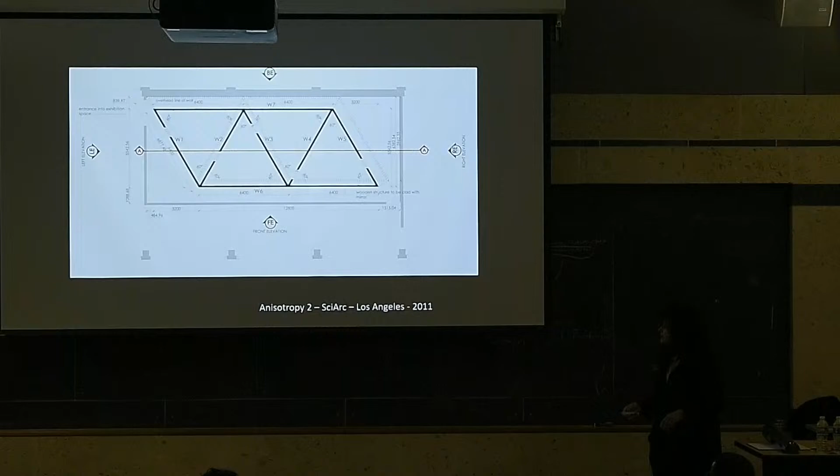But what you don't see is that every wall is not vertical, and all of them are covered inside by mirror. You see that from the top, and there are passages in between them. Because they are not vertical and covered by mirror, when you are inside, you don't know where you are. You are totally lost.

The space can't be perceived as it is. The regularity of the triangle is totally changed, because you don't know where are the limits between the floor and the walls, and because everything is reflective. You are enjoying the space by playing in that space to be lost. I like to lose people in the space sometimes with installation, not in architecture - sometimes it's complicated to do that, but why not? Experimenting, because it's an experiment.

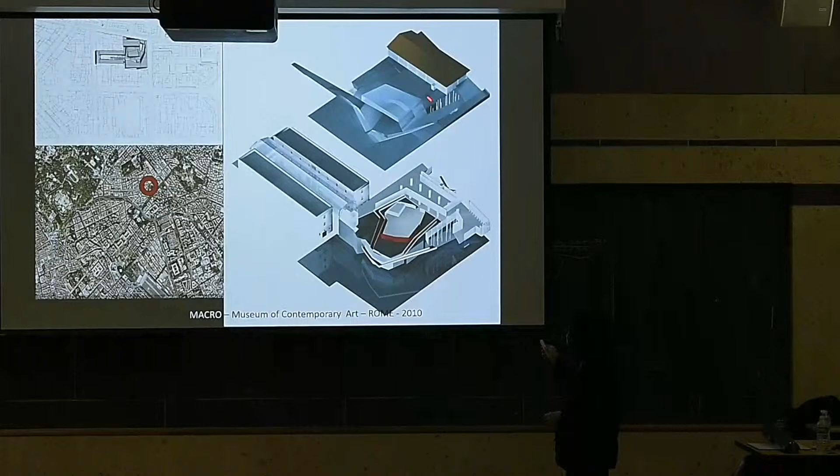But I took advantage of that, because I could hide myself behind the facade I had to keep, just cutting the angle to create a corner for a new entrance. Using the difference between these two levels, these two doors, I created something totally inside the facade, with a new floor 4 meters below the existing floor, at street level, covering the total surface with a big roof, and having in between a ramp going from this courtyard up to the roof or down into the building, to create a double connection at two levels between these two parts. Entering there, you have a huge exhibition room of 1,000 square meters, an auditorium in the center using the space I had to keep with the historical structure connected to the courtyard, covering the total surface with a roof that I had to keep.

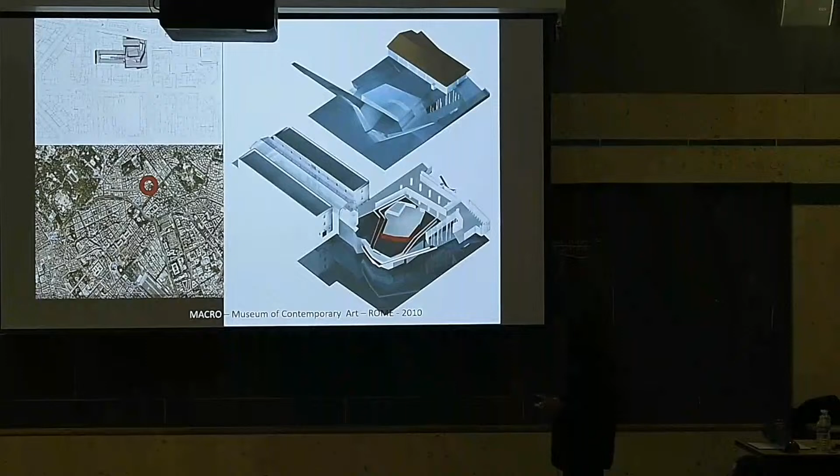So now we will travel in. This is the new entrance of the museum, located between the two facades that I kept.

I painted them white, because everything in Rome is painted yellow, but I wanted them white. So I negotiated with the historical monuments authorities at three levels - the state, the region, and the city - for an hour and a half to get permission to do it white. How I did it: I said I could do it black. They said, what? Black in Rome? So I said, maybe we can go to white. Finally after an hour we agreed. Sometimes you have to negotiate like that - push further and go back, because this is what you want to do.

This is the back. And between these two facades, I created a cafe, a glass box suspended over the entrance, in the street. Because this street turns a little bit, when you're inside you have the impression that you are in the street, over the street.

So we start underneath the cafe and enter a little courtyard, because they asked us to keep a courtyard with some trees. As soon as you enter, there's another level - the cover, the roof, the surface at the entrance, and the mid-level, which is a passerelle, a promenade. I did this because this pavement is the basalto we have on the pavement in Rome, and on the roof cover too - it's basalto. These are two public spaces, one outside, one inside, continuing the city and the pavement.

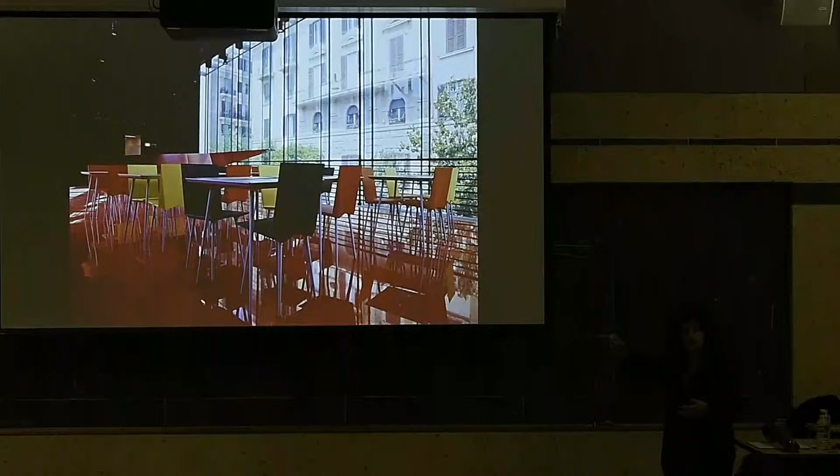And what is it, why do I show you that? This is because the ground floor is in relation to the ground floor of the surrounding buildings around. There are only residential buildings around. The cafe is at mid-level, so it is connected to the people at mid-level of the building. And the roof is connected to the people on top. So there are different connections to the area around, thanks to the different levels that we have.

And the toilets - I speak about toilets, and I show my toilets, because you have to know, if you think carefully, that toilets is a space that has no regulation. This is the only place where you can play, you can experiment, you can do whatever you want. Because you just have to have a surface dimension, you have to have some ventilation and light, that's it. So nobody asks you anything about toilets, so you can play with toilets.

My toilets are like a box that I inserted under the old structure, covered with mirror stainless steel outside and inside, with a big mirror at both extremities. In the center, there's an object that is white and becomes red when you want to wash your hands, because you're manipulating your hands above it and crossing infrared coming from the ceiling. As soon as you cross the infrared, the water comes up, and the dryer comes up too. So you play with it, and you smile when you get out of the toilets. Nice, no? It's an art piece also.

This is another museum I did, as Igor said, the Frac in Rennes, west of France. It's a particular place, a bit outside at the limit of the city, where they were building a big park, but also a particular place because there's an art piece erected there, from a French artist who did concrete art, playing with geometry and mathematics.

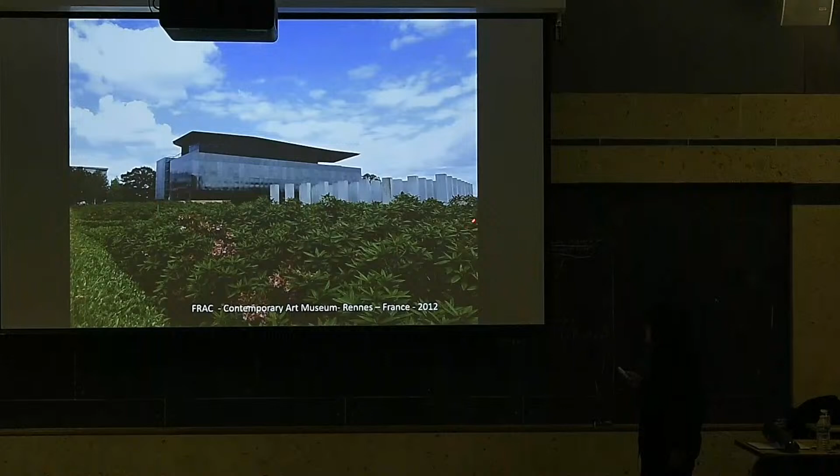She was 92 when I won the competition, and she gave regulations for the building's competition. She said she didn't want us to light a piece from the museum, and that we had to create a silencious facade, so I decided to respect what she wanted. It wasn't erected yet, but it was erected later on. This piece has maybe 72 stones of granite, with dimensions of 81 by 72 centimeters, 4.5 meters height - so it's playing on the number 9.

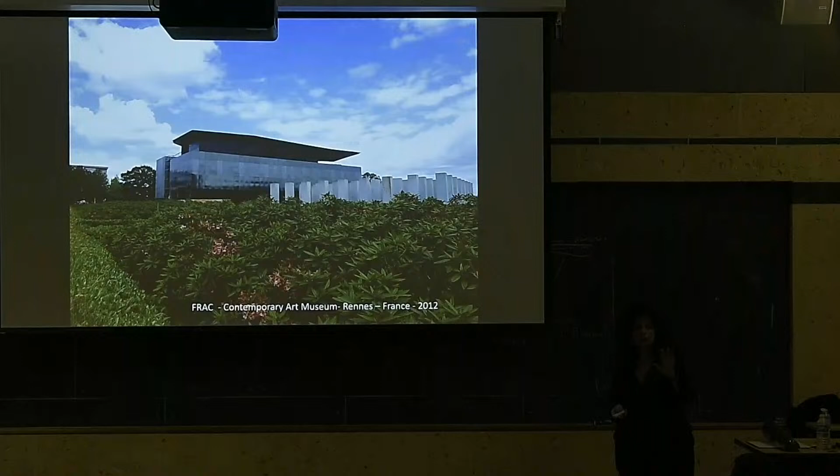So I was thinking, okay, my facade is black. It's a black monolith, but this black monolith is made with different materials. The top part covers the main exhibition room, and is covered with black mirror stainless steel facade. So it's black, but because it's mirrored, and because the weather and the sky change every hour in Brittany, the color of the top changes a lot.

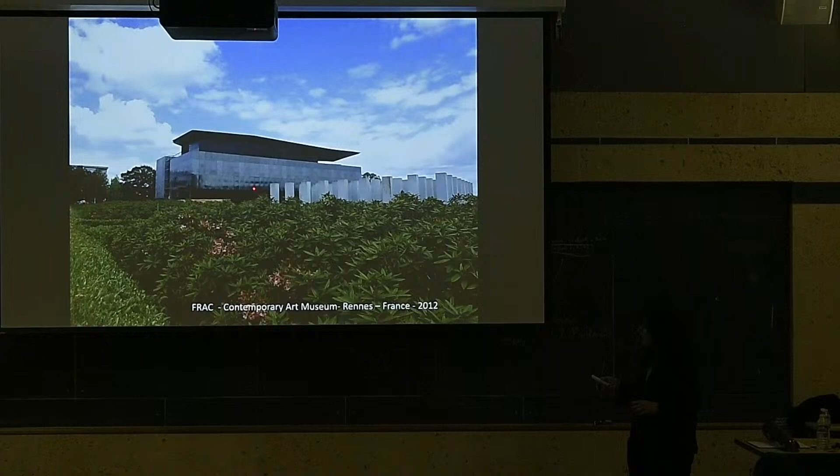Below, the mid-level is at the level of these stones. Below that, there's glass, starting from black to light gray. On the side, this is a black concrete block, but you see it as gray because the weather is dry. As soon as the weather becomes humid, the concrete becomes darker and blacker. So there are 3 different kinds of black, playing with the color only through the weather.

And the entrance is there - you don't see it, but now it's written that it's the entrance. So it's a silencious monolith because the artist asked for that.

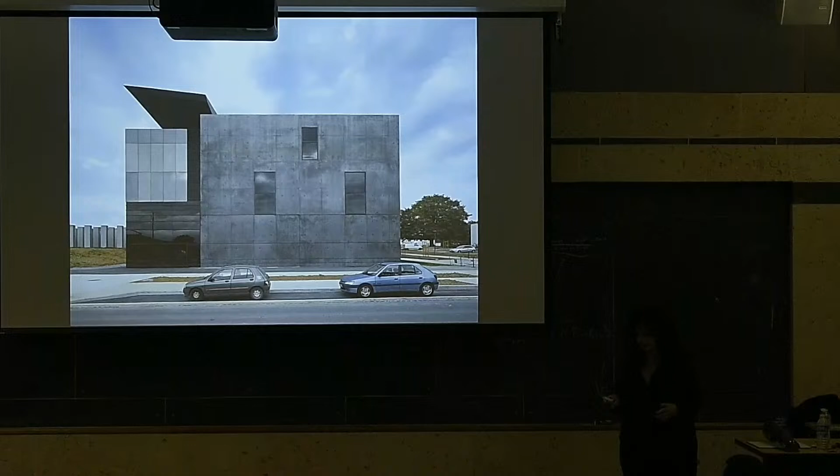But inside, this is something else. I cut this monolith all the way along, created a glass roof on top to light the central part of the museum, with an auditorium in the middle, and all the elevators and the promenade in the middle. As soon as you enter, you face the back side of the auditorium, and you can't go there, even if you see there's a lift.

You have to go back to the facade, and you see that the facade is transparent, and you have to take these steps - climb them all the way along the facade until you reach the cafe first, on the park side, and then go to the back side to walk the steps and the ramps in the middle of the cut I made in the volume. Sometimes there are just steps, sometimes ramps, and sometimes a stair, which is just sheets of metal anchored in the concrete with just a parapet.

It's 30 meters high, from the top roof to the storage below, inserted 8 meters below the ground floor. So it's a kind of void, very narrow, very long, but could be problematic for people who have vertigo, because it's very narrow.

So I decided not to do the usual glass parapet that you have usually, with something on the bottom and the glass standing up. I said we should inverse that. So we decided to create an inverse parapet by having this big row of steel and anchoring the glass under this handrail. It took a year and a half to convince the control office to do it, because it wasn't usual - it wasn't in the regulation, it wasn't anything. But after that, we succeeded in doing it.

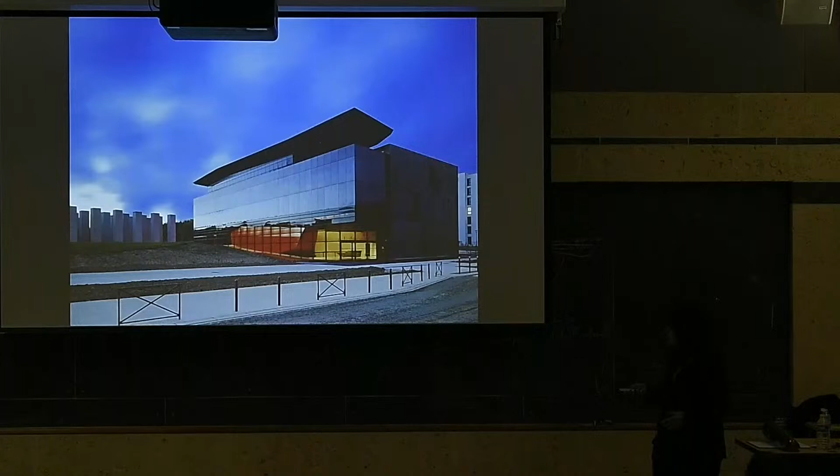And at night, the light is coming from below, but not outside, because we lighted only the auditorium. And the top part becomes more and more darker until it becomes like a lantern.

In China, I did a competition also for a paleontological museum. It's a place close to Nanjing where they discovered the bones of the man of Nanjing. At this time, it was one of the first, the oldest one discovered on Earth. And this man was living in these mountains, in grottos in these mountains.

So I went to the site, I visited the grottos, and I saw where they were found. When you are an architect and you visit such a site, you are moved to know that you are walking on the path of the man of Nanjing. That means millions of years before us.

So this is particular. I was thinking, these people—because it was a couple—were living in the mountains, and we could establish the museum wherever we wanted.

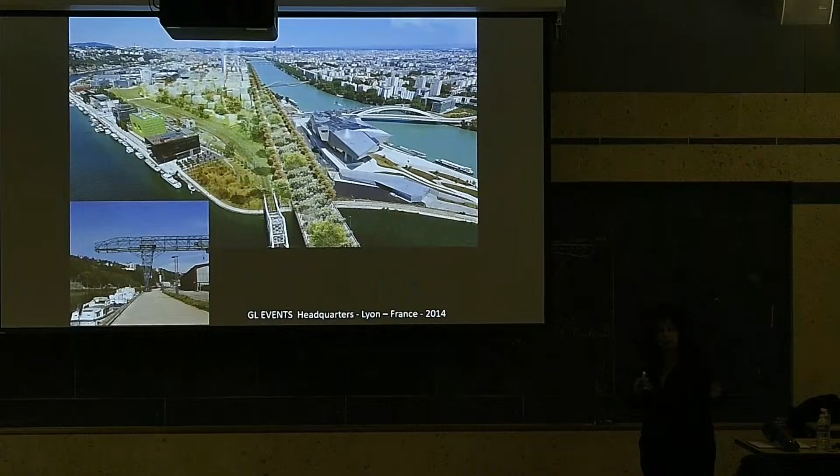So, because I was at the end of the site, I decided to play with the objects still remaining there, which are the big cranes used to transfer goods from the land to the river, by building a particular structure. My plot is that one.

But I decided to pivot the top part to go toward the river, to have the end of the block meet the angle of the bank. And to create that—this is 1, 2, 3, 4, 5 floors...

...in cantilever of 28 meters long, I had to create a huge structure inside. And this structure has 3 pylons, in reference to the pylons that we saw before.

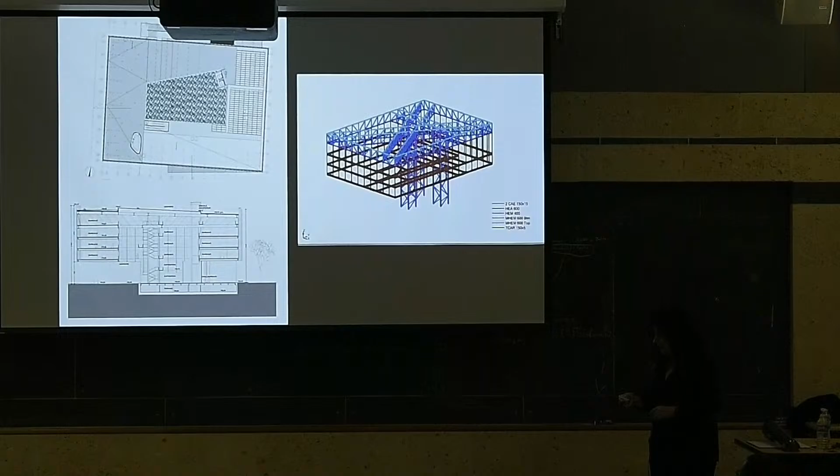And with a huge structure on the top to hang all the floors from the top to bottom. And we built that like that. First, we built the ground floor, the underground with the car park. Then we built a column, the only column in concrete that we have for the shaft for everything that we needed. We brought by the river the pylons and all the beams. And then from this huge structure on the top, we hung the floors. So they are really tiny, but they were suspending the floors below.

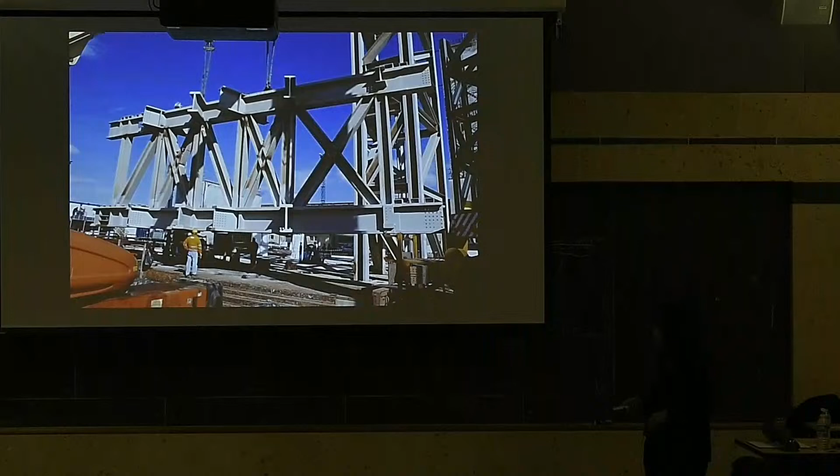The main beams on the top are very high. You can see that in reference to the man on the bottom. And no, this is not that. This is the building in cantilever of 28 meters going to the river.

And we had to work at the beginning of the competition with an artist. They asked that we work with an artist to insert art into the building. So I worked with Felice Varini, a Swiss-French artist living in Paris, who works on point of view and perspective. I told him, okay Felice, I will do a very simple block, please change the perception of my building. And he said, first, you never give an order to an artist, I do what I want. I said, okay Felice, you will do what you want.

So he came back to me and said that he will erase architecture, which is arrogant compared to the landscape, by taking photos from the top of the building, a virtual place on the top, taking photos of the 4 directions, and reapplying the photo on the facade to make the building disappear into the landscape, but in black and white.

And I think, okay, thank you Felice, because my block is transparent. This is for offices, and I will use this piece of art to filter the light inside. So finally, art is useful. And he said, oh no, this is not that. So that's a joke between us, like that.

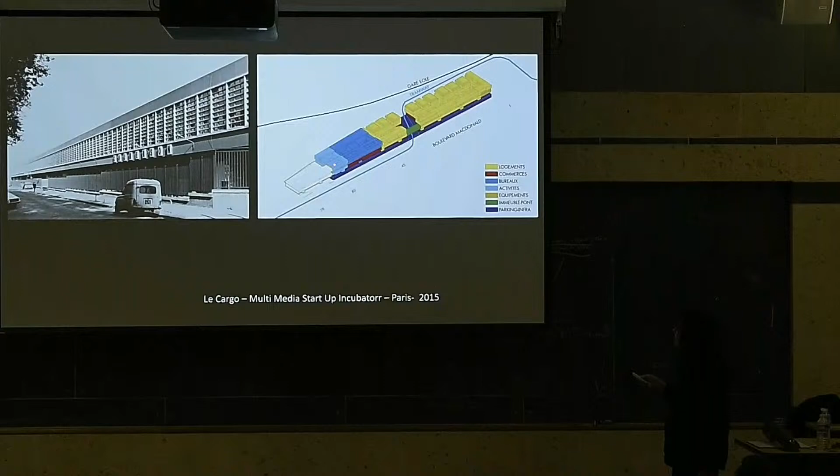Rem Koolhaas gave just a very simple regulation. He said first, the ground floor is crystal, because this is transparent, this is commercial. Then you have to keep the structure, which is in concrete. You have to step back, again crystal, a transparent facade, and then again something solid.

So I said, okay, what can I do with that? I decided, because it's a multimedia startup incubator, these people are creative, these people are full of ideas. So I will create my facade with bubbles.

On the south facade, they are white. On the north facade, they are black. And on the side, they are black and white, because I'm the only one who has a side facade. With that, I said okay, now the motto of the building will be everything black and white inside, except the meeting rooms, which will be bubbles, red bubbles.

So above the lobby, which is black and white, we have a bubble for meetings above. On the back side you have another bubble. To go there, you have to take a little passerelle to go inside that bubble for a meeting.

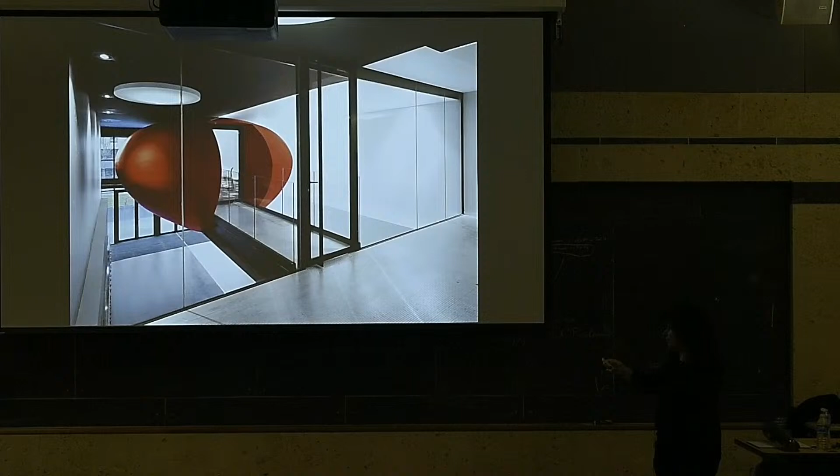We designed tables that are not regular, because this is for creative people, so they can sit as they want. We decided that they will do as they want. We redesigned the carpet with portions of circles, bubbles again. And the lift arrival at every floor is black and white, and the inside of the lift is black on one side and white on the other. When you push the button, you don't know which one is coming, the white or the black.

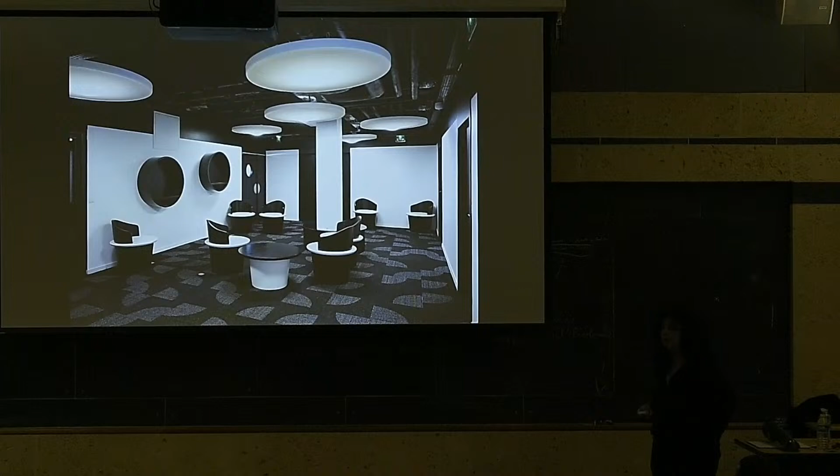On the back side there are some seats and tables where you can work. And then on the top part, we have huge bubbles overlooking Paris, because we are very high in Paris. And you have also, okay, and that's it.

And this is the last office building that we built in Paris. Maybe you have heard, maybe you didn't, that there is this new tower in Paris by Renzo Piano, which is a new courthouse, on the north. My site is in between, that huge railway coming from the center of Paris, the Gare de l'Est, and another bridge passing above over the boulevard which is below, and a little bridge coming from the courthouse. My building is just in between these two bridges.

So my building is going down to the boulevard. Under that we have 3 floors of public car park. We have to maintain and sustain the traffic of the bridge coming from the station. We have a tunnel under this bridge, because this tunnel is to bring the prisoners to the courthouse, very controlled by the police.

I propose to have some offices immediately on the boulevard and to create the tower like that, not a tower, 8 floors only. But I twisted the first block, because maybe you saw that this is built with 3 blocks. When I was passing on the boulevard below for the competition, I discovered that the first part could be seen with a different facade, turning, twisting, to have different views on this building.

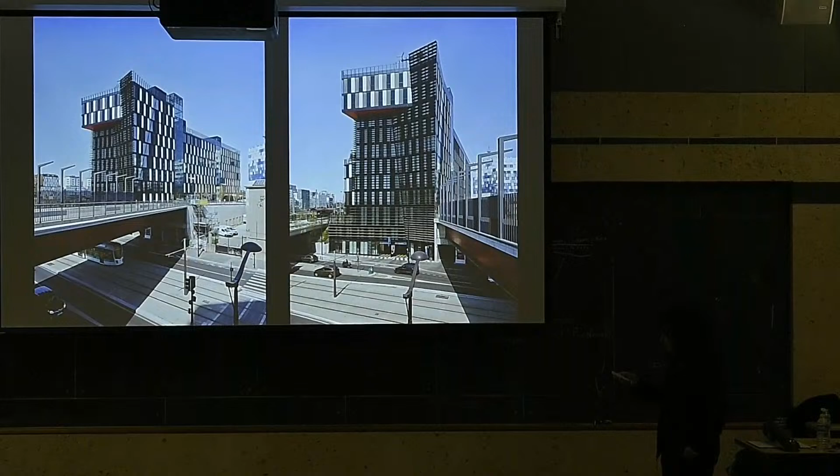So I decided to twist it and to have that on the top, at the front going down to the boulevard, to create that with a particular structure, because the city of Paris is asking to have wood in buildings today. So the pillars are in steel. The slabs are beams of wood with concrete slab connected to them. And that means that this top part is in cantilever.

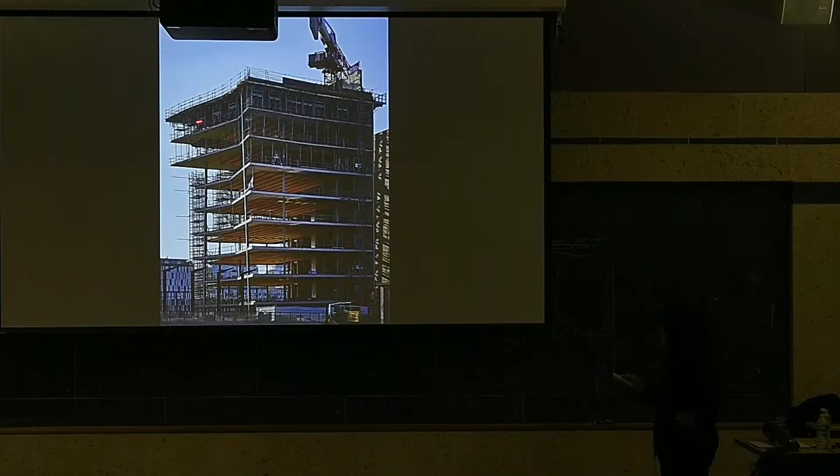And when you go into the offices plateau, you see these beams in wood, and in between the beams you have the shafts. You don't see anything, and you have the petals suspended in the plateau. The staircases are large, because I wanted to have that as a greenhouse, a place for traveling, for connection between the different floors, and the top part is not. This is playing with the light, with the serigraphy of dots on the glass, to protect from too much sun, and in the night.

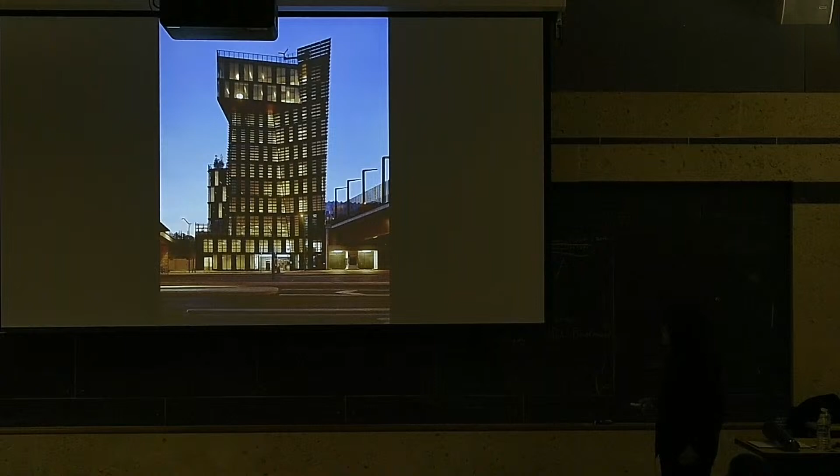So I did a tower in Barcelona. This tower was already a concrete skeleton before, which had been stopped in 2008 because of the financial crisis. A client, a company partially funded from New York and partially from Luxembourg, bought it and decided to create a tower.

This was not a tower, it was a building, quite high, but not a tower. On the back side, we had another building. So we proposed, because it was a competition again, to demolish that building, add all the floors and surfaces we had at this part to the tower, to create it to go up to 100 meters, what the client wanted.

We discovered that the regulation of the place allowed us to go further at every floor to create balconies and reach the 100 meter limit. But for doing that, adding a lot of structure and weight on this building, which was a concrete skeleton from 10 years ago, we had to reinforce the foundation.

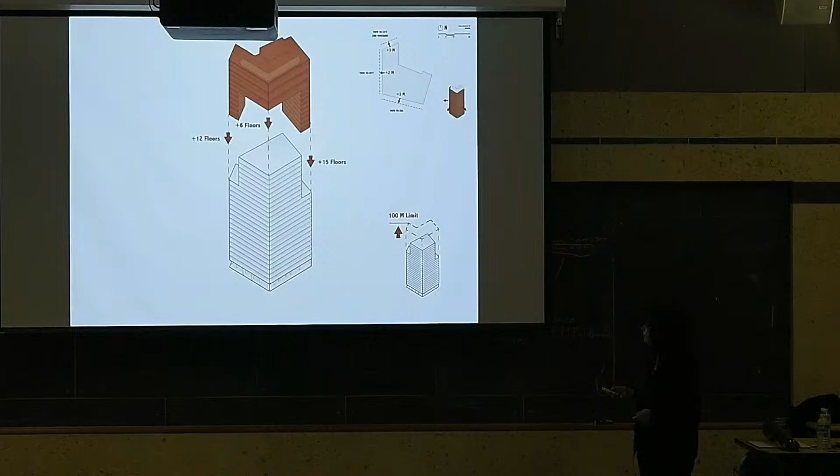The foundation was going into a car park of the hotel below, so we couldn't add pillars. We had micro piles put into the foundation of the hotel, and then we reinforced the floors to create the balconies and expand the surface. So this was a huge structural problem at the beginning.

Looking at the plan of this object, which was not very nice, I decided to enhance it, to give the impression of enhancing the height, and we developed an undulated surface form. We demolished two floors below to add to the top, to go to the 100 meters. So this is the undulation we have, where every floor is different.

This is a lobby, which is now 10 meters high, and with a mirror surface on the ceiling, we have the impression that it's 20 meters high. So we took the javelots I showed you earlier to create a chandelier with 25 javelots suspended together, reflected in the ceiling.

We also installed some seats in the lobby, a green wall, and the basement, which is a big wellness center of 1,000 square meters with a yoga room, some sport facilities, and a swimming pool.

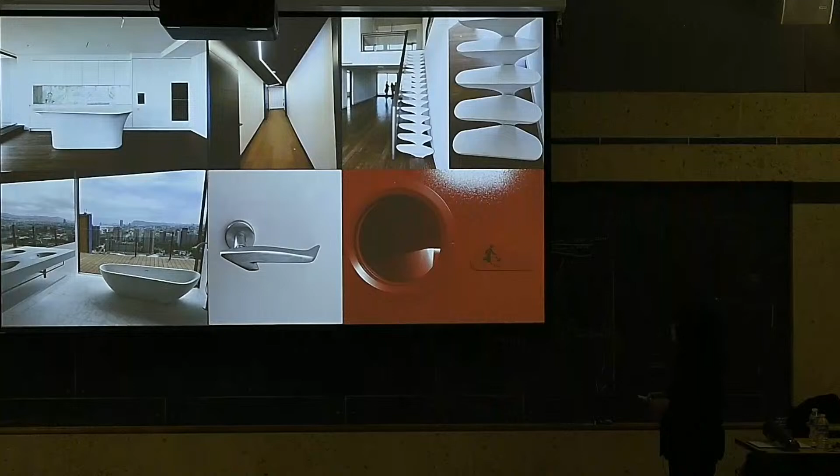So we design the kitchen islands, the bathtub, the door handles, the signage, the steps of the stairs, and the lighting in the corridors, and more and more, and the cafe, the restaurant on the ground floor.

I asked my client if I could do it, and they said okay, you can do it. This time it was with contract, all of that.

Yes, and I designed also the garden in the backside, etc. We designed the seats, the tables. I was advising the chef on the glasses, on everything.

And we designed a big, huge lamp, not a chandelier, which is very long, with a lot of objects inside, and the toilets. It's a mouth, and inside you wash your hands.

So this is a huge building, but now I also do some little ones. This one is in Grenoble, an artist residence. The owner is an art collector, a woman. She's living there, and she had a little garden going down into the trees.

I visited the place and discovered that if I stayed on the ground, the artists who would live there would never see the fabulous landscape in front of us. So I decided to create a kind of vertical house.

But from the backside, from her garden, it's silent, so as not to disturb her when she's in her garden. But you have views overlooking the Alps and the city of Grenoble, so it's quite nice.

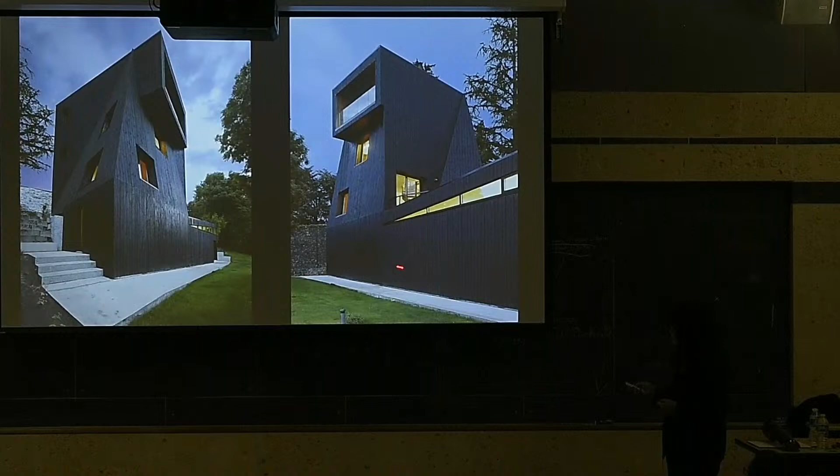And by twisting the vertical volume to catch the light and the sun from different directions, and to have the workshop down below, it's all in wood except the backside, which is in concrete.

And the vertical volume is like that. Very little tiny volume, a living room, a bedroom, and on the top a belvedere to overlook the Alps and the city around. So this is a black wooden house.

And I did a white glass house in Brittany for an Englishman who had an illness of the macula in his eyes. He came to me and said, I want to have a house which is totally lit, totally bright, never having one part of the house more lit than the other. Because he was in the glass and steel industry, he developed a kind of super layered system of glass with particular insulation inside to create homogeneity of the light.

So I proposed to him to have an inclined parallelepiped, and to perform this parallelepiped in white glass, like that, with some transparent windows to have a look outside. And inside, it's like that. He has an art collection. So at the beginning, when you enter for the first time, you feel, oh, it's not really like that. But finally, you get used to it.